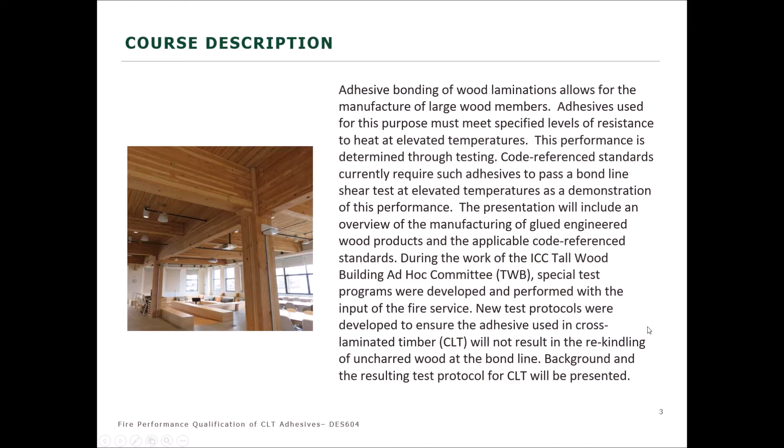You know that this has been going on literally for centuries. Glue laminated timbers go way back, and for that matter, things like plywood.

This is a different type, and among the things we want to cover as a learning objective: what is cross-laminated timber and how is it different from or like other glued laminated products?

What have you done to examine its properties? That would be compartment testing. We're going to talk about the compartment tests that have been done by AWC, by others, going back quite a ways. There are adhesive qualification tests, and ultimately that was the goal of all of this: to come up with a qualification for adhesives to be used in mass timber buildings.

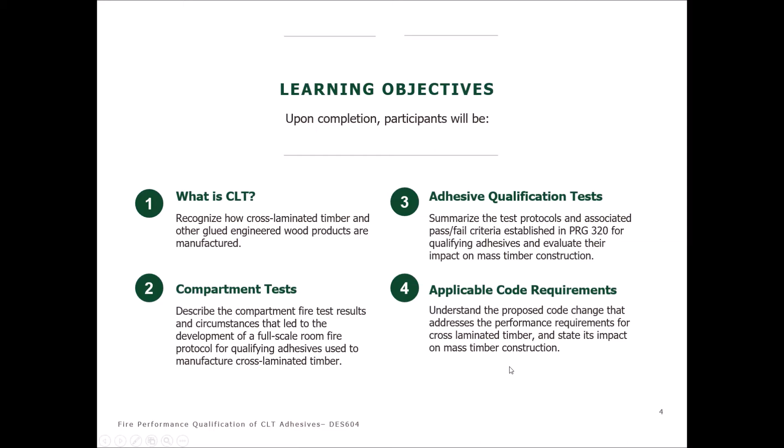And then ultimately there will be some discussion of the Tall Wood Building Ad Hoc Committee's proposed tall wood language.

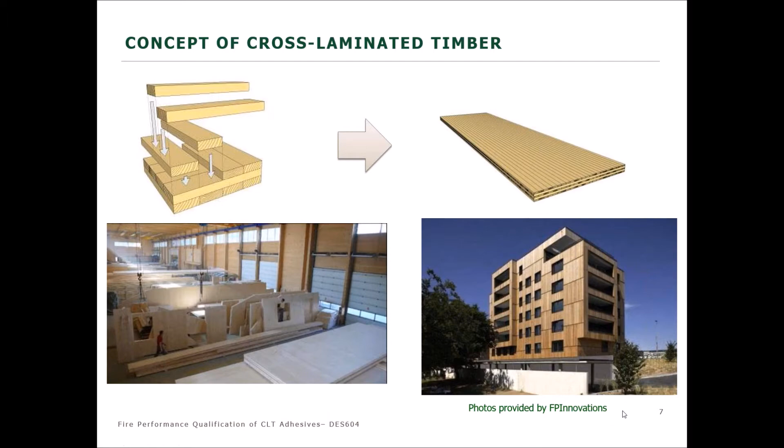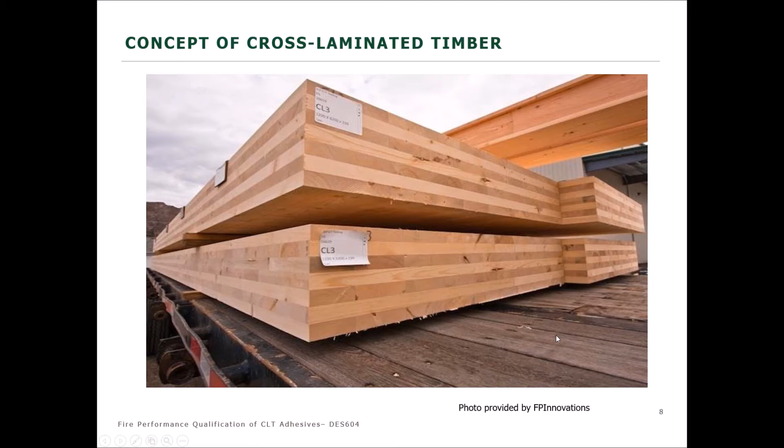Typical is 3 to 7 layers. That can be up to a foot thick, and depending on the manufacturer, it can be 11 or 12 feet wide, 65 to perhaps 80 feet long, depending on who's making it. By the way, having said those dimensions, just remember, after you make this stuff, you've got to ship it someplace. So did you really want to make one 85 feet long?

The concept of CLT is new in building material terms. After all, the research isn't that old. In the 1970s, the first patent in 1985, the first project in 1993, and like any other material, utilization and selling the product results in improved technology. Improved press technology occurred, and by the early 2000s this was an important material advance, and the Europeans took advantage of it. It's primarily driven by the green building movement, and that's because of carbon sequestration.

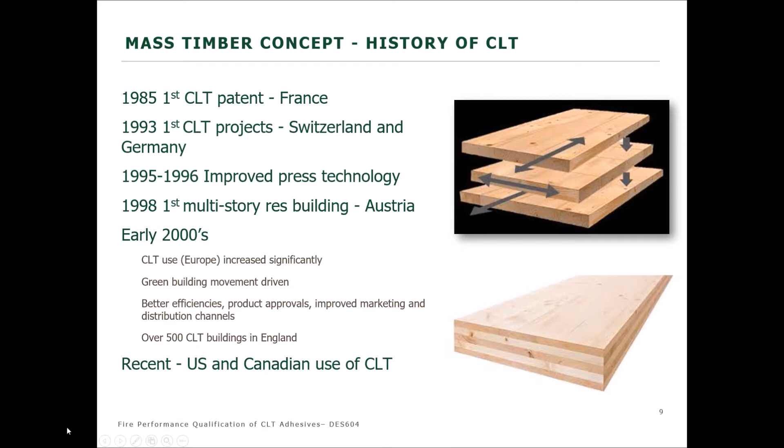And in Europe, the so-called cap and trade on carbon is a big motivator. It costs you money if your green footprint is not good.

So anyway, cross-laminated timber. First, let's have a quick refresher on glue-lam beams: dimension lumber laid up all in the same axis, adhered together, various properties adjusted. For example, if you want more fire resistance, you may add more strength in the tension lams and so forth.

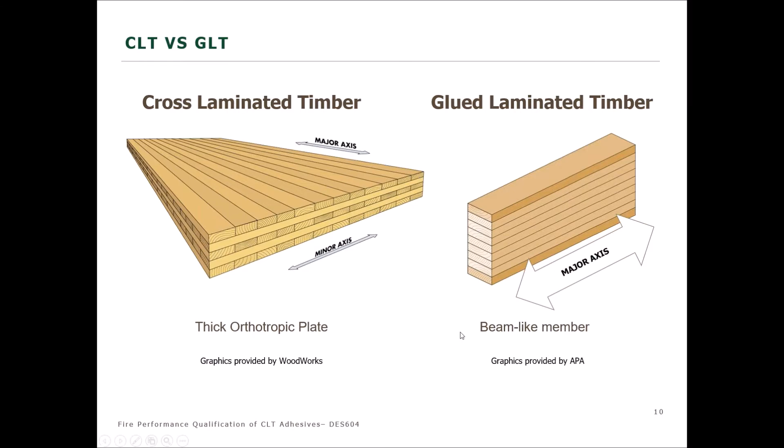So cross-laminated timber is different in the sense that, in this illustration, the top layer of dimension lumber is oriented parallel to the major axis. The next lam down is oriented to the minor axis. And what's different about the two? Well, CLT has two axes, a major and a minor, and they have to be accounted for.

The components of CLT are essentially a lamination - that's a piece of dimension lumber laid next to its neighbor, which is a similar dimension lumber. In the PRG 320 standard, the mechanical properties of those are accounted for. That's what dictates the properties of the CLT panel.

A layer is one or more laminations in the same plane, of the same species, grade, and thickness - so we might have 2 laminations of this 2x material here with their dimension running parallel to the major axis. Those two laminations together would be a single layer.

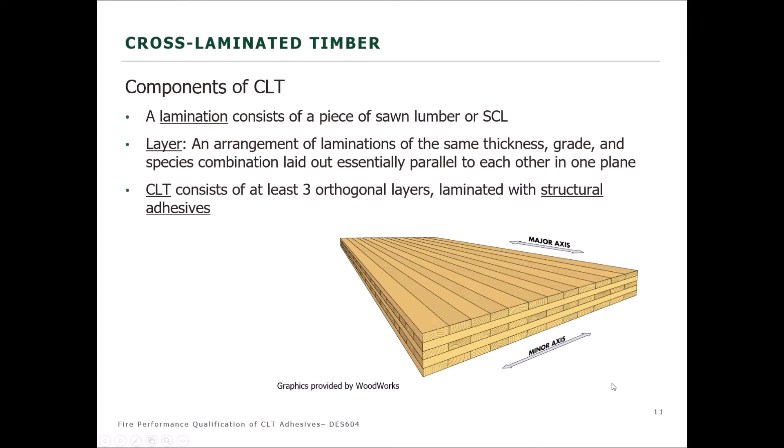And the definition of CLT consists of at least 3 layers with structural adhesives, oriented in orthogonal layers.

Okay, so that brings us to a polling question. Marcy, please. Which of the following is true regarding CLT? All laminations within a single layer are parallel. Alternating layers are perpendicular. There is a major and minor axis. Or, all of the above.

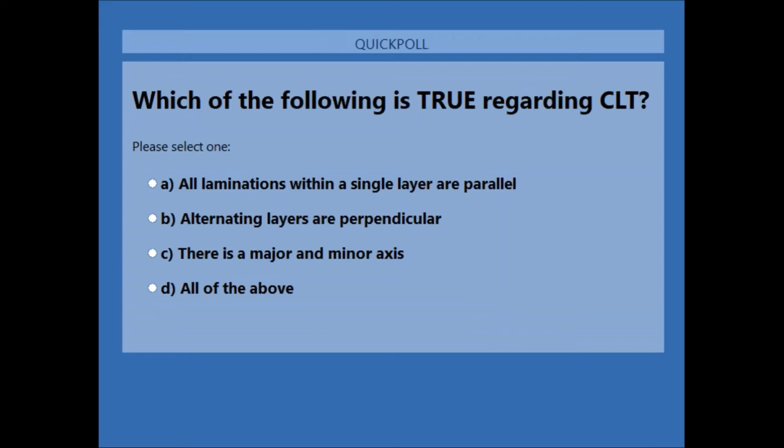We need a little Jeopardy music here. All right, I've got 30 seconds, so I'm going to go ahead and close. And 79%, so that's close enough. Let's see, 89% say all of the above, with just a smattering for each of the others. So I'm going to have you tell us the real answer. Actually, I think we're going to go back to Jason here. Yep, thank you, Marcy.

I'll go ahead and answer that. The correct answer is all of the above, so most people did get it right. Within CLT, it is true that all laminations within a single layer are parallel, the alternating layers are perpendicular to each other, and then there's a major and minor axis as well.

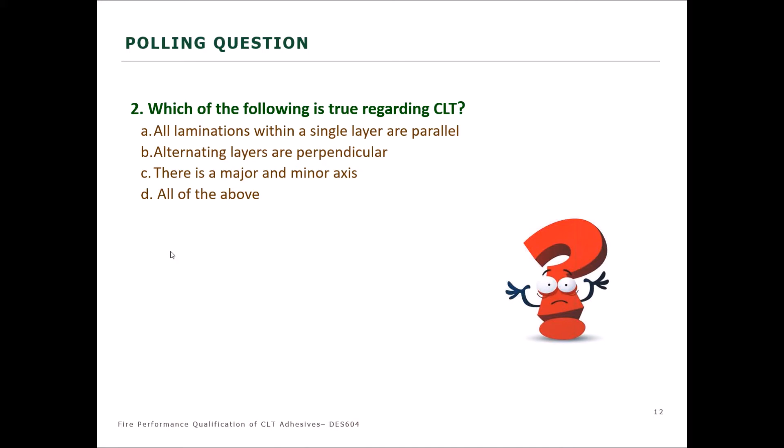So starting on the second portion out of the 4 segments in this webinar, I'm going to talk about the compartment tests, or some of the compartment tests that have been done. In a webinar we presented last week, we spoke about the various fire tests performed in order to guide and inform code development for tall mass timber buildings. The objective of this code development activity is to ensure safe construction practices and safe design for tall mass timber buildings. Many of these fire tests are referred to as compartment fire tests.

A compartment fire test is one performed within a compartment that has at least one opening. These tests simulate a natural fire within an enclosed or sometimes partially enclosed area, such as a room or apartment. The fuel load used for compartment fire tests often consists of real furnishings and other contents typical of the simulated occupancy, for example Group R or residential occupancy. Other fuel types are sometimes used though, such as wood cribs or gas, either in addition to or as an alternative to the real furnishings.

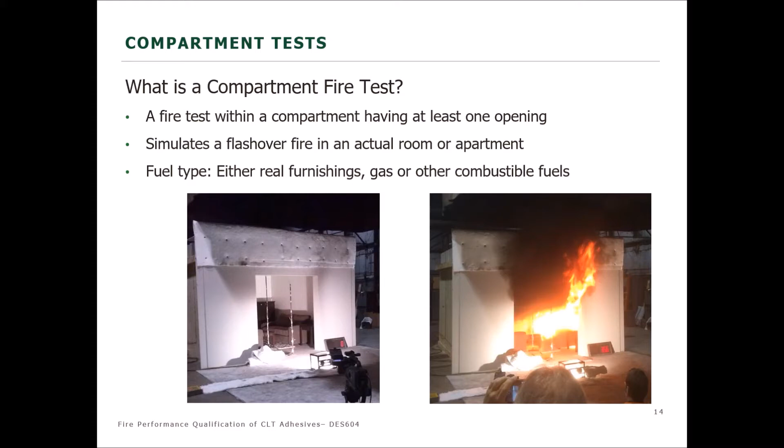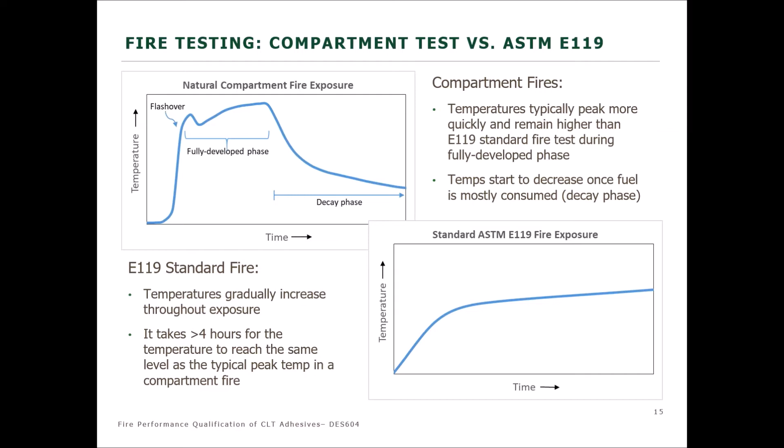In 2017, the Fire Protection Research Foundation, part of the National Fire Protection Association, commissioned a series of 6 compartment fire tests. I spoke about this test series in last week's webinar, but I'm going to delve into them more deeply here because they're of greater importance to this topic. The tests were done for NFPA's Property Insurance Research Group, or PIRG, and the purpose was to collect data on the contribution of CLT elements to compartment fires for insurance modeling.

Testing was performed by the National Research Council of Canada, and it was conducted at the National Institute of Standards and Technology Fire Lab in Gaithersburg, Maryland.

All 6 compartment tests were constructed of CLT with the same overall dimensions: 15 feet wide by 30 feet deep. The opening was 6.5 feet tall by 6 feet wide on 4 compartments, and 6.5 feet tall by 12 feet wide on the other 2, situated on one of the 15-foot end walls. In 2 of the tests, all CLT surfaces were protected — these were the baseline tests, since the CLT did not become involved in the fire and therefore did not contribute to fuel load. In the other 4 tests, various CLT surfaces were exposed.

Fire performance parameters such as heat release rate, temperatures, and heat flux were measured in each test. The contribution of the exposed CLT was determined by subtracting the values of these parameters from those measured in the corresponding baseline test.

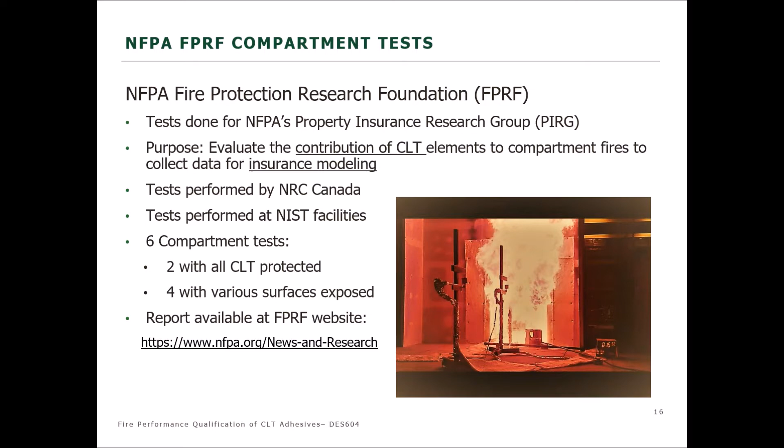Among the findings: the CLT did not significantly contribute to fuel load in compartments with gypsum wallboard on all surfaces — in other words, all mass timber surfaces protected. In those cases, the mass timber did not contribute. For tests in which certain CLT surfaces were left exposed or unprotected, the CLT contribution increased with increasing exposed surface area.

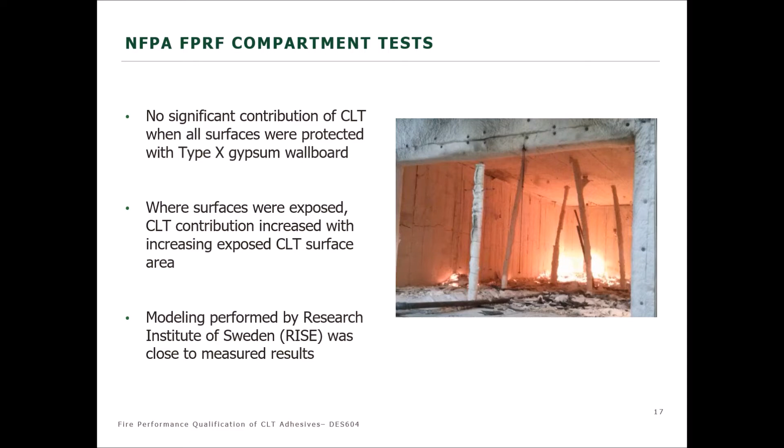As I noted in last week's webinar, the degree to which CLT contributed was modeled by the Research Institute of Sweden, or RISE, in advance of the test. The actual test results in terms of heat release rate and temperature were very close to the model predictions. So the contribution of exposed CLT in a compartment fire can be accurately modeled, and it was confirmed that this is the case.

In addition to those findings, fire regrowth was observed in 3 of the 6 FPRF tests. By fire regrowth, I mean a behavior in which the fire, after cooling significantly during the decay phase, starts to re-intensify again. In each case, the observed fire regrowth coincided with the failure of an adhesive bond line between the layers of CLT.

Based on data from thermocouples embedded within the CLT at depths corresponding to the bond lines, it was apparent that failures were occurring before the char front reached the bond lines. This is what we call heat delamination.

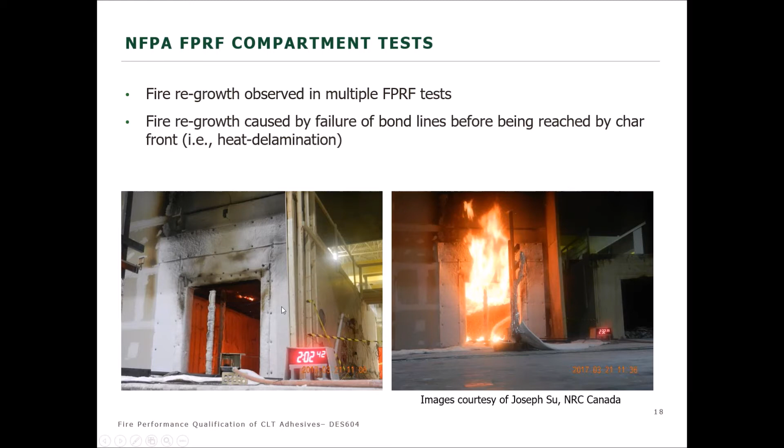One might expect the fire would slowly continue to cool from this point and eventually self-extinguish due to insufficient remaining fuel. But if you look at the photo on the right, you can see that's not what happened in this test. That photo was actually taken just half an hour after the one on the left, and yet the fire had regrown to the point of a second flashover.

So let's focus on that test 1-4 in particular — I'll refer to it from here on as FPRF test 4, for simplicity's sake. Remember, this is the test shown at the bottom of the last slide, and in that test the entire CLT ceiling was exposed. This compartment had an opening size of 6.5 feet high by 6 feet wide, the smaller of the 2 opening sizes tested in the FPRF series.

The comparative baseline for test 4 was test 1-1. Test 1-1 was the same as test 4 in every way, except that it did not have an exposed CLT ceiling. Thus, there was no contribution or involvement of mass timber elements in test 1-1.

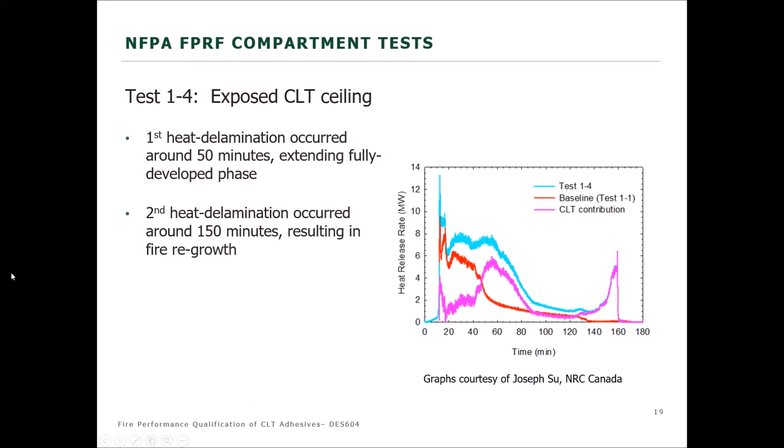Okay, let's watch a video here.

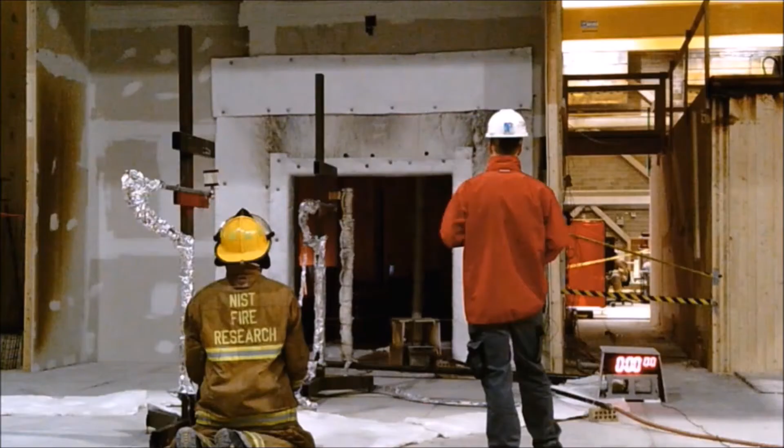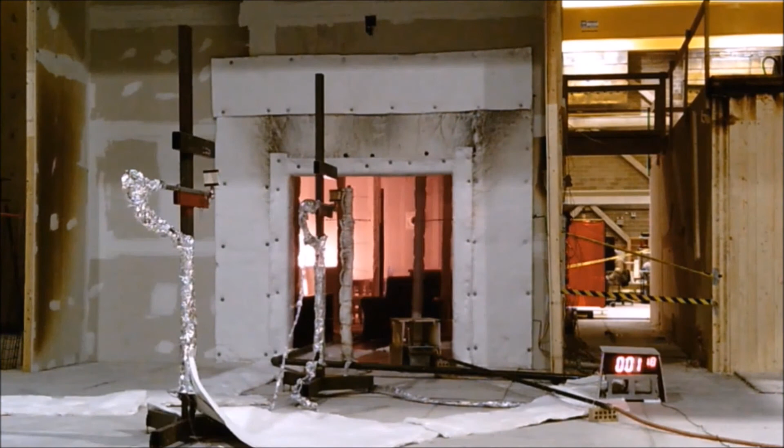This is a video of FPRF test 4. This test lasted for 2 hours and 40 minutes, but this video is greatly accelerated so that it's compressed into approximately 2 minutes. Once again, these tests were performed at NIST. Remember that this is the test that had the exposed CLT ceiling.

So there's flashover, it occurred right around 12 minutes, and this is the fully developed phase. I'm not sure if you can read the clock near the opening of the compartment, but it's just to the right on the ground there. We're at about a half an hour here.

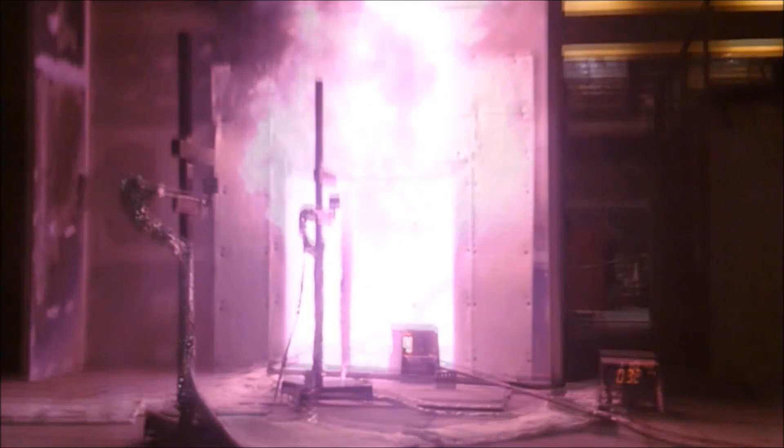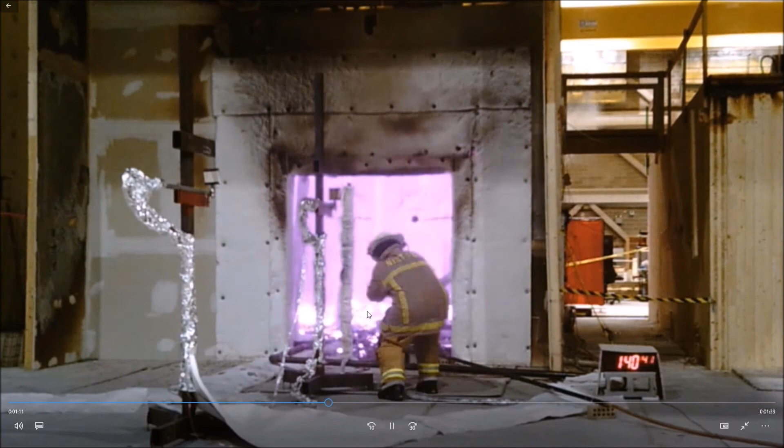Now we skipped forward to about an hour and 40 minutes, and we're entering the decay phase here. This is where the cooling takes place as the combustible contents become mostly consumed. You can see that they're reduced to basically just embers on the floor there now.

Unfortunately, you cannot see the CLT in this video, but it would have a layer of protective char on it at this point, which helps to prevent fire regrowth. But coming up soon here is the start of the heat delamination of the second bond line, which I told you about, and the resulting fire regrowth, which we're approaching now on this video.

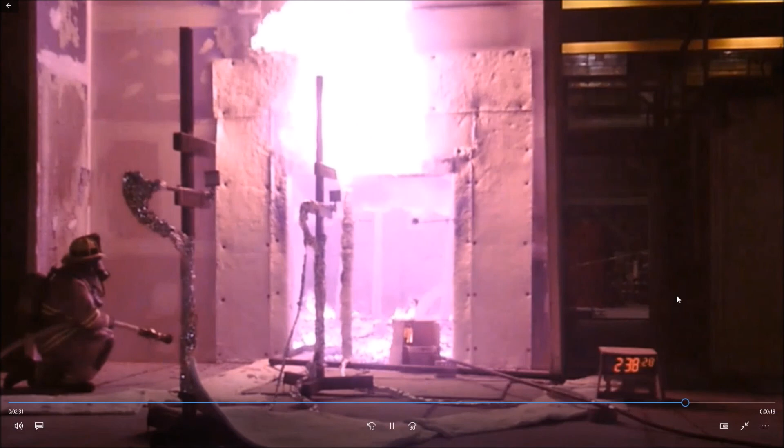And that fire regrowth eventually led to a second flashover. We're at 2.5 hours here. Then they extinguish the test, or terminate the test, at 2 hours and 40 minutes, approximately.

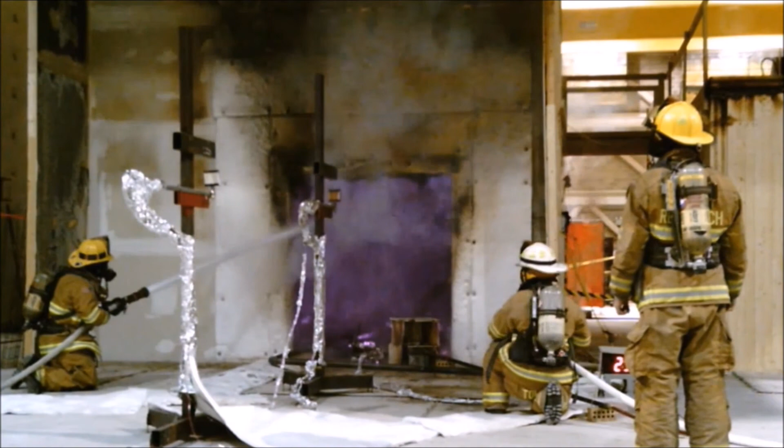Now, the video we just saw was, like I said, FPRF test 4, but the fire regrowth behavior was also observed in other FPRF compartment tests in which there were exposed areas of CLT, either on the ceiling or on the walls. In all of these cases, it appeared that the fire regrowth was caused by a heat delamination of an adhesive bond line within the CLT.

Of course, the implication of this observed behavior is that in rare instances, such as the scenarios represented by this test series, a fire may not necessarily burn out on its own. In other words, it may not self-extinguish even after the furniture and other contents are consumed.

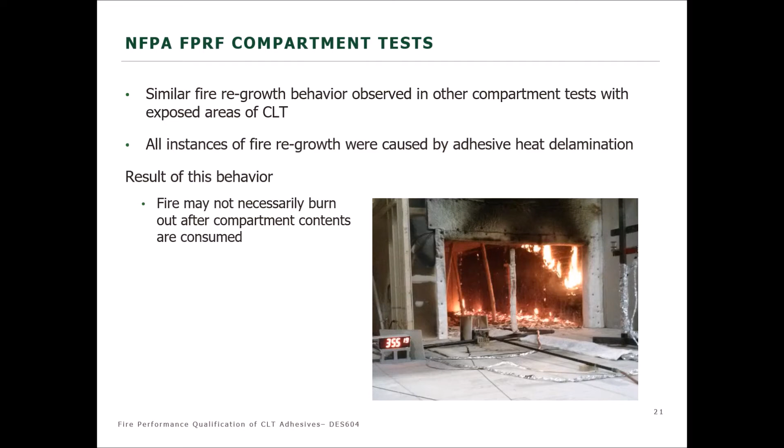Earlier in the decay phase of this test, there was an extended period without flaming on the wall and very low heat release rate. Here again, this fire regrowth was a result of a heat delamination that occurred in one of the bond lines. However, it should be noted that in this test, the fire regrowth was not nearly as intense. It did not result in a second flashover, and the compartment eventually cooled down again on its own. But of course, as we saw in test 1-4, that's not always the case.

Okay, Marcy, would you ask the third poll? In the FPRF compartment tests, all instances of fire regrowth were caused by adhesive heat delamination. Is that true or false?

Our learners are right on top of things here, so we've got about 70% have voted. I've got about 10 more seconds.

All right, I'm going to go ahead and close. And we've got 89% have voted true and 11% false. And Jason, I'm going to let you say what the correct answer is.

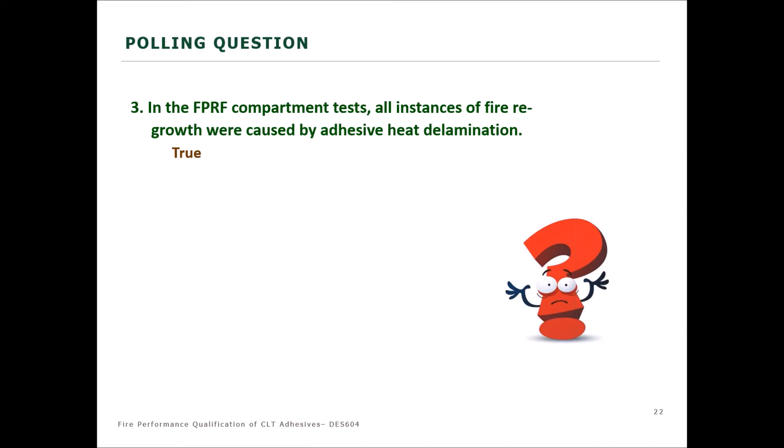Okay, yeah, that's good. Again, most people got it right. It is true that in the FPRF compartment test series, all of the instances of fire regrowth were caused by adhesive heat delamination, and they were directly linked to it.

So moving on to the third segment of today's webinar, we're going to learn about a couple of different adhesive qualification tests that are used and how they were developed. But first, I wanted to speak briefly about a part of the impetus behind the development of these adhesive qualification tests, specifically the direction provided by the ICC Ad Hoc Committee on Tall Wood Buildings. So I'm going to ask Sam if he would talk a little bit about that.

My slide 24 includes the position of the ICC Tall Wood Building Ad Hoc Committee. You're seeing a slide that shows solid wood with a char layer. The important parts of that illustration are that wood chars at a predictable, steady rate, that the char insulates the wood, and the unheated center core maintains its mechanical properties, strength, stiffness, etc. So the performance, both structural and fire performance of wood, is predictable.

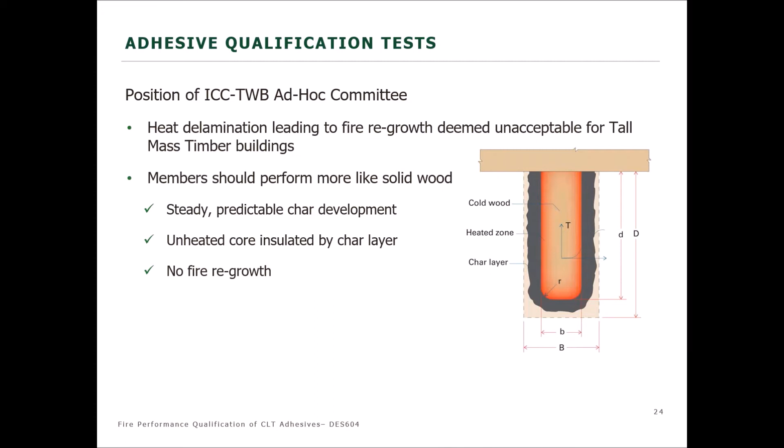The position of the ad hoc committee was great, but if you have fire regrowth, or if you have delamination because adhesives behave differently than straight solid sawn material, what happens? The position of the ad hoc was actually to draft code language. So Jason, if you would advance to slide 25.

The ad hoc had 4 working groups, including one on fire, and that fire work group identified the need to develop a test protocol. That group developed language that requires fire performance of CLT, and requires labeling of the CLT reflecting that performance, which can be interpreted to be a protocol for heat delaminating adhesives.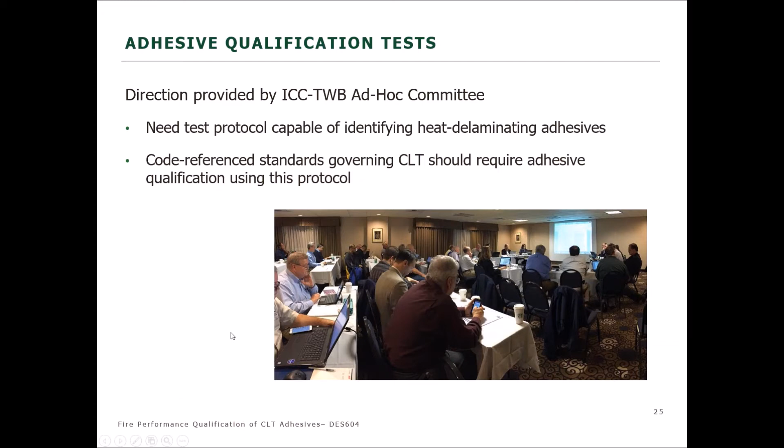There are actually two things going on here. One is delamination, the other is fire regrowth, and it was the ad hoc's position that both needed to be identified, and the acceptable performance required by some protocol. So if you'll give me slide 26, then I'll let Jason pick up again with the testing that begun at Southwest Research.

Okay, great. Thank you, Sam. So based on the direction provided by the ICC TWB Ad Hoc Committee that Sam just mentioned, in the fall of 2017, AWC commissioned Southwest Research Institute to develop a test protocol which would be capable of distinguishing between adhesives that can lead to fire regrowth versus those that do not.

Specifically, there was interest in replicating the severe exposure conditions of the FPRF compartment test series to determine whether or not the same fire regrowth behavior would have been observed if the FPRF test had been performed using CLT products made with other adhesives.

In order to determine this, it was necessary to replicate many of the aspects of the FPRF compartment tests. For example, a large-scale compartment test was used rather than a small or intermediate scale compartment, and the aspect ratio of the compartment footprint was about the same, about 2:1 depth to width ratio. Also, the compartments were constructed to have the same ventilation ratio as that of the FPRF tests, having a small opening, which was about 0.03 meters to the 0.5.

I will note that this compartment size was not exactly the same size. It was smaller than what was used in the FPRF test series. However, it's large for a standardized test, and it also had the same aspect ratio and same ventilation ratio.

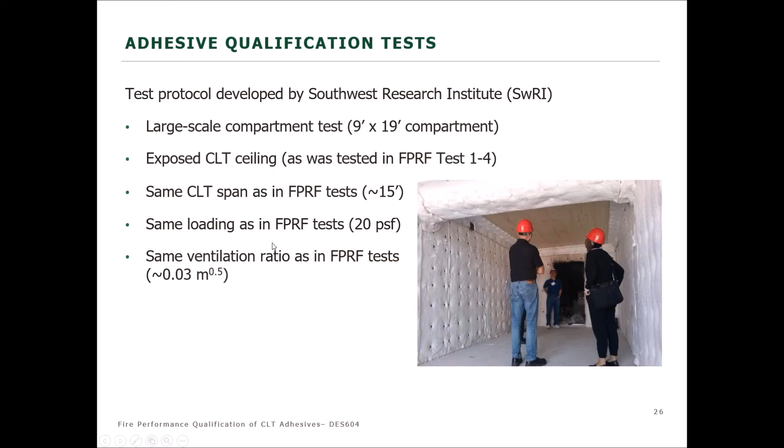As for the exposure, the gas burners within the test compartment were calibrated to replicate the exposure conditions measured in one of the FPRF baseline tests, test 1-1. This was the baseline test that had the small opening, the 6.5 foot high by 6 foot wide opening. This exposure replication was based on the measured heat flux near the ceiling in the FPRF test.

The graph on the left shows temperatures that were measured on one of the thermocouple trees in FPRF test 1-1 with respect to time. The graph on the right shows temperatures measured in the large-scale compartment test calibration performed at Southwest. Note that the time-temperature curves are similar. They're not exactly the same, but that's because, as I mentioned, this replication was based on heat flux to the ceiling rather than temperature.

So it's really based on exposure to the CLT. The discontinuities or apparent steps in this graph, the graph on the right, are a result of the fact that the gas flow rate followed a step function rather than a continuous curve. But the heat flux to the ceiling at any given time, and more importantly, the cumulative heat flux to the ceiling throughout the test, were very close to the measured values in FPRF test 1.

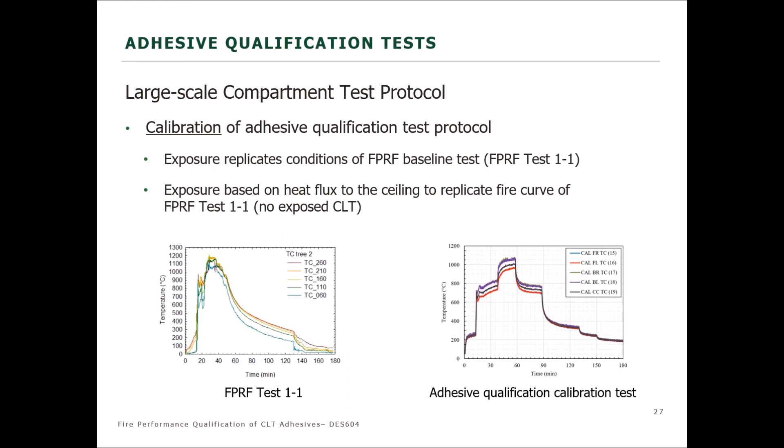So the calibration test confirmed that it was possible to replicate the conditions of FPRF baseline test 1. However, it was still necessary to validate the test protocol by testing the same CLT that was used in the FPRF test series. As I noted previously, this test protocol involves an exposed CLT ceiling, which is the same condition that was tested in FPRF test 4.

So it follows that the test protocol would be considered valid if the test performed on the same CLT that was used in the FPRF tests resulted in the same behavior that was measured in that test. These are some of the photos of the validation test that was performed at Southwest.

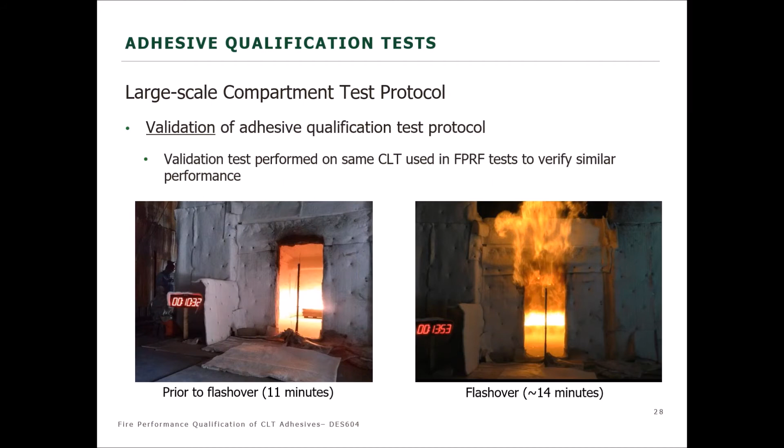The photo on the left was taken at about 10.5 minutes, just prior to flashover. You can still somewhat make out the exposed CLT ceiling because at this point it had not yet ignited. The photo on the right was taken just after flashover, about 14 minutes after the start of the test.

Here are two photos from the fully developed stage of the validation test. The one on the left was taken near the beginning of the fully developed phase, about 15 minutes. If you're wondering what was causing that little bit of flaming on the floor near the opening, that was actually just the gypsum wallboard facing paper. The lab placed that there to protect the concrete floor from the fire.

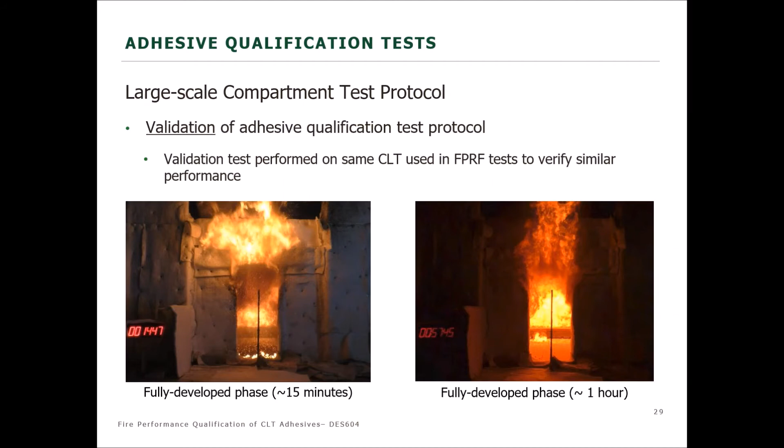The photo on the right was taken at about 1 hour, which was about two-thirds of the way through the fully developed phase. It was right around this time that the first bond line started to undergo heat delamination. This corresponded closely with the performance that was observed in FPRF test 4 at this stage.

On this slide, the photo on the left shows you a visual of the conditions within the test compartment during the decay phase. This photo was taken about 3 hours into the test, just before the fire regrowth started. The photo on the right was taken about 12 minutes after the one on the left, at about 3 hours and 10 minutes.

You can see that there was indeed significant fire regrowth leading to a second flashover. This fire regrowth here, again, just like in the FPRF tests, was caused by the delamination of the second bond line in the exposed CLT ceiling.

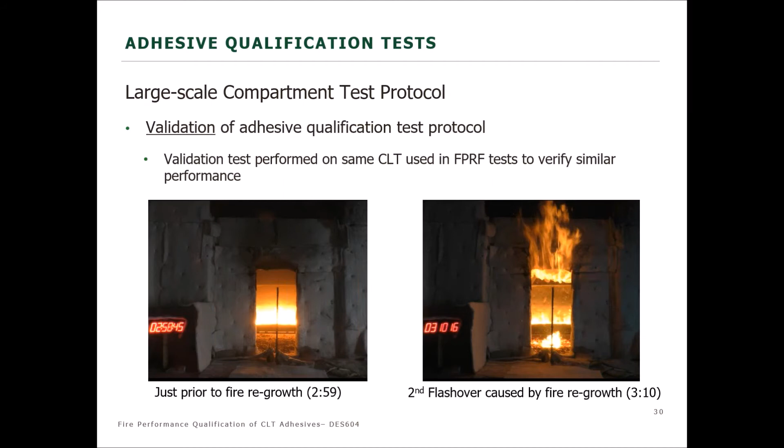Let's watch a video of that one now.

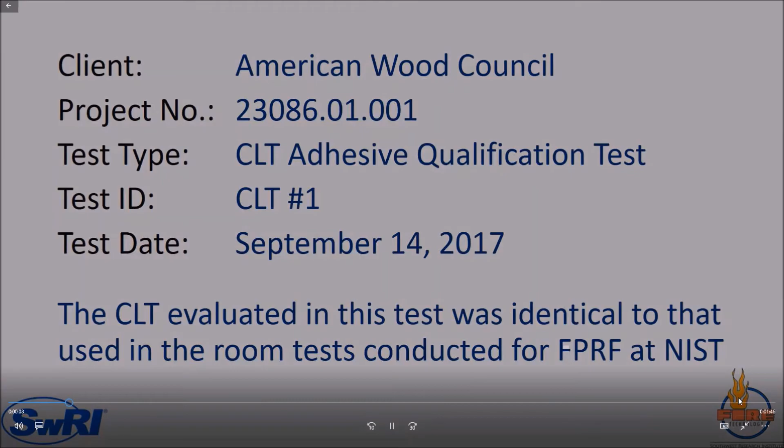Again, this is the validation test of the adhesive qualification procedure, or protocol, that was developed at Southwest Research Institute. This was a 3 hour and 11-minute test, compressed into about a 2-minute time frame. So there are some times here when it's played very quickly. It's slowed down at this point because this is the flashover here, about 13 or 14 minutes.

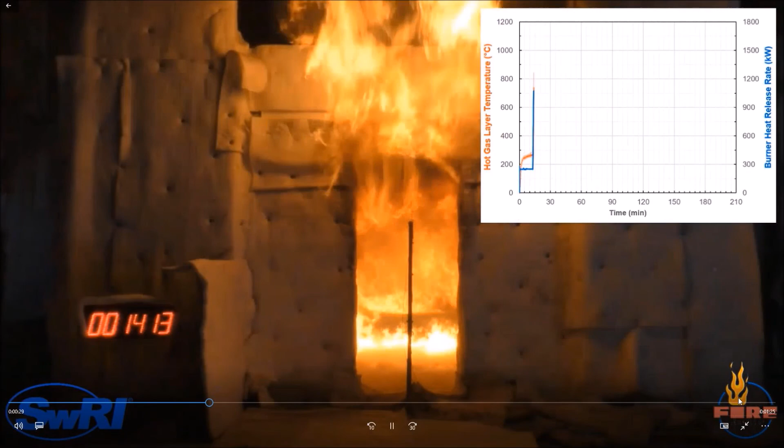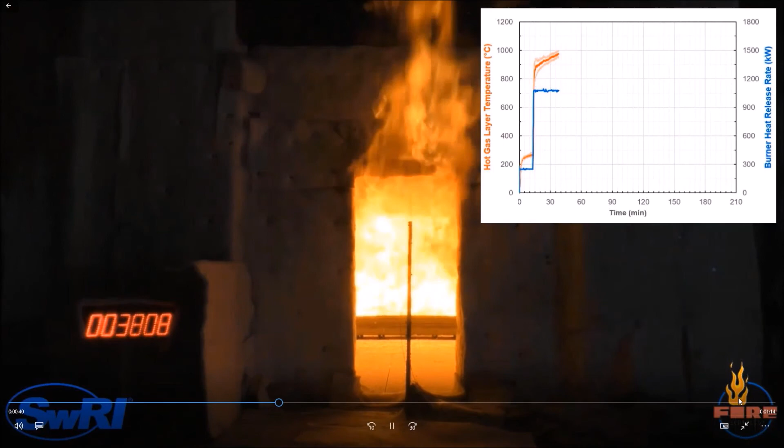And this is the fully developed phase. We just skipped ahead to 38 minutes there. Still in the fully developed phase at this point. Now we're past 1 hour.

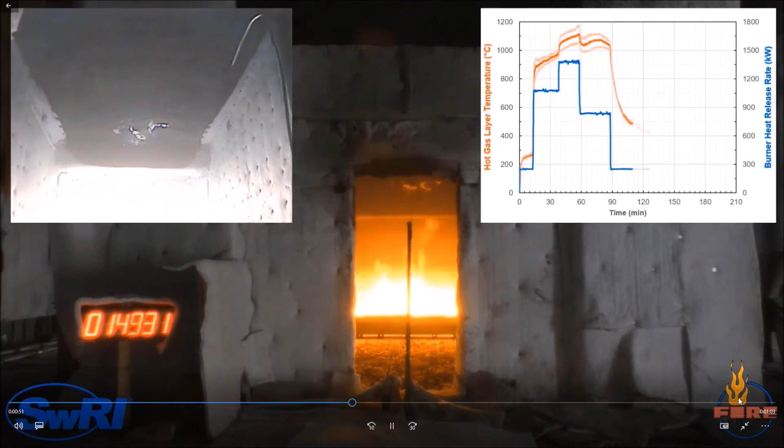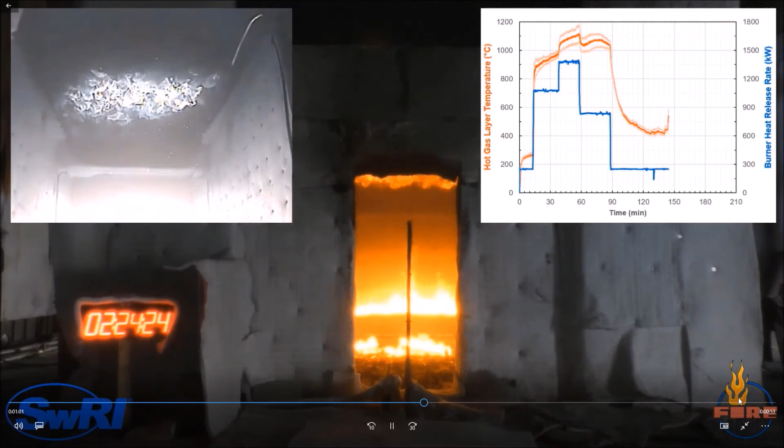And this is past 2 hours now, in the decay phase. You can see that for the most part, there's a protective layer of char over the entire ceiling. However, you do see some flare-ups that are occurring there, some fire regrowth.

Now we're getting to the point where the major fire regrowth, the significant fire regrowth, started to occur just past the 3 hour mark, and it did result in a second flashover, which you can see there. By the way, the inset there is the ceiling - you probably figured that out already. That's the black and white image in the top left. The test was terminated at about 3 hours and 11 minutes.

Here are the measured time-temperature curves from the 4 different compartment tests that we've talked about so far. The 2 graphs on the left are from the FPRF tests, while the 2 on the right are from the tests that were performed at Southwest Research Institute.

The time-temperature curve of the validation test that we just saw in the video is shown in the lower right, and the curve of FPRF test 4, which we saw in the first video, is shown in the lower left. The graphs at the top are from the tests performed without any exposed CLT, so they're like the baseline tests, while the ones on the bottom are from the compartments that had exposed CLT on the ceilings.

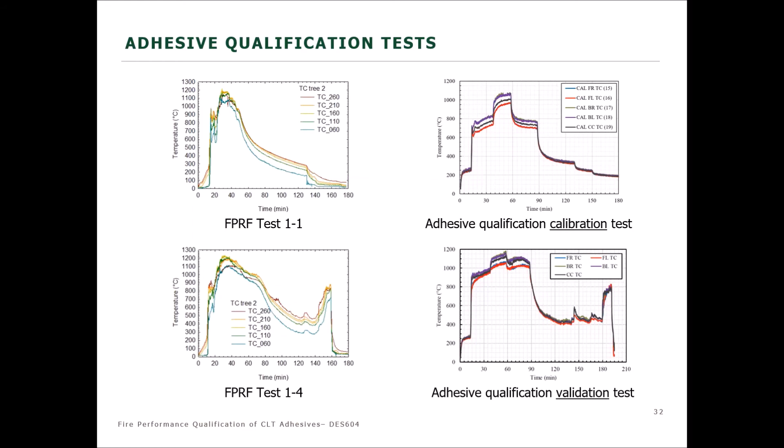As you can see, there are similar differences between the graphs on the top versus the respective graphs on the bottom. This indication of how the exposed CLT affected the temperatures within the compartments was consistent between the two test series.

Now let's just look at the two tests in which there was an exposed CLT ceiling. A comparison of the temperatures at the ceiling reveals that during the decay phase, just prior to the fire regrowth, temperatures were about 450 degrees Celsius. This was the case for both the FPRF test and the validation test performed at Southwest. The measured temperatures from the two tests were also consistent with each other at the end of each test during the fire regrowth stage. In both tests, the measured temperatures were right around 800 degrees Celsius at this stage, near the end of the test.

This provides conclusive validation of the adhesive qualification test protocol. The objective of functionally replicating the exposure conditions measured in the FPRF compartment test with a more repeatable and slightly smaller test protocol had been achieved.

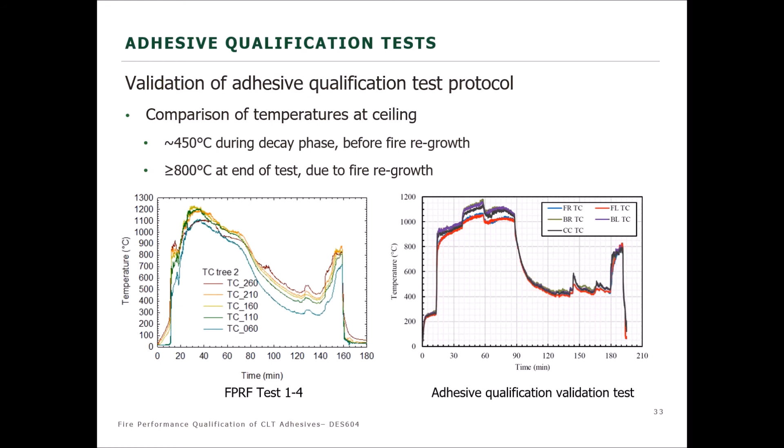As I mentioned earlier, one of the reasons we wanted to develop this test protocol was to determine whether or not the same fire regrowth behavior would have been observed if the FPRF test had been performed using CLT products made with other adhesives. To that end, CLT products made with other adhesives were also subjected to the same exposure under this test protocol.

For example, the time temperature graph from a test performed on CLT made with melamine formaldehyde resin is shown on the lower left, and on the lower right is a time temperature curve from a test performed on CLT made with an improved formulation of polyurethane resin. So that's the improved version of polyurethane resin there.

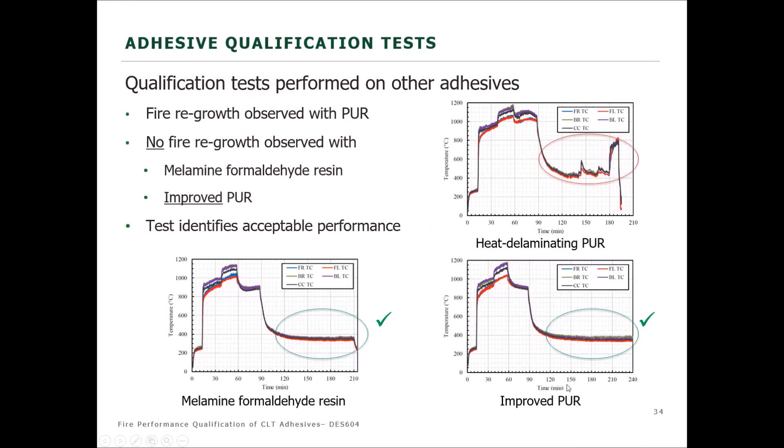So if you inspect both of these graphs at the bottom of this slide, you can see that no fire regrowth occurred during either of these tests. This is obviously very different performance than that observed in the CLT made from the heat delaminating polyurethane resin. In fact, these graphs confirm performance that is very much in line with what would be expected from solid wood.

In addition to the large-scale compartment tests we've been looking at, there's also an additional small-scale adhesive test used for CLT adhesives in North America. Specifically, I'm referring to CSA O177, which is referenced within the PRG 320 standard, the product standard for CLT referenced in the code.

In this test, a specimen of CLT made with the adhesive being qualified is exposed to a Bunsen burner flame having a temperature of between 800 and 900 degrees Celsius. The exposed face is the edge or cross-section of the CLT, such that the edges of the glue lines are directly exposed to the flame. The duration of this exposure is 10 minutes, 5 minutes in 2 different orientations.

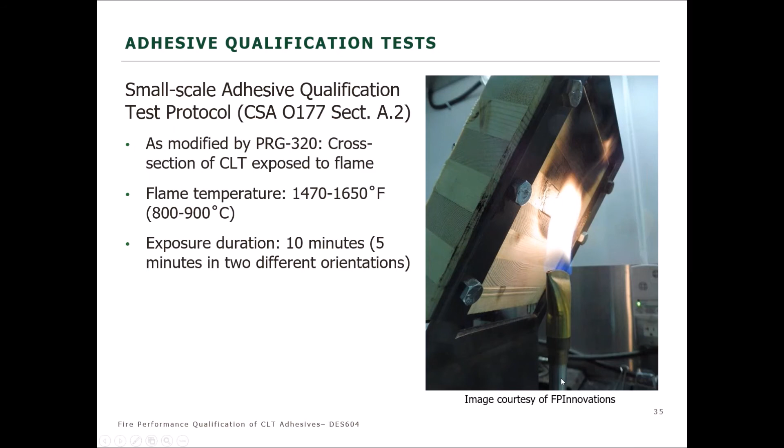Following the test, the samples are cut in half so the cross-section of the specimen is visible. The CLT samples are then inspected for delamination using an optical comparator to measure the 5 inner bond lines for the total length of delamination. Under the acceptance criteria specified within this standard, the sum of the delamination of these 5 exposed bond lines shall not exceed 3 millimeters, a little less than 1/8 of an inch. So that's the sum of all of these, and it needs to be less than 1/8 of an inch.

As such, this small-scale test distinguishes between adhesives that undergo heat delamination versus those that do not.

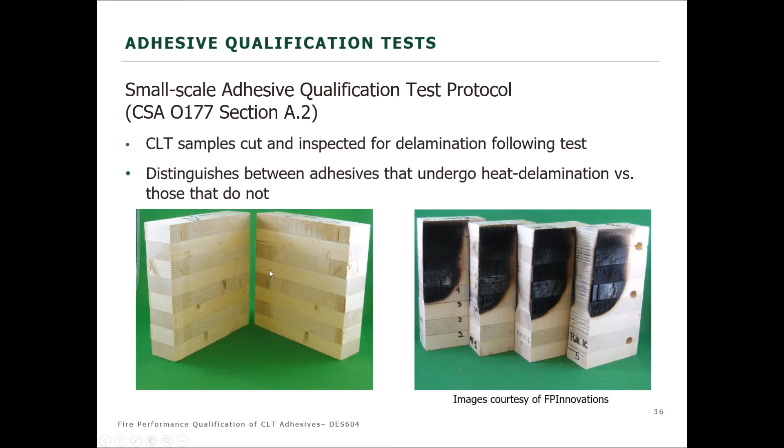This photo on the left shows what the samples look like before the test, and this is after the test here.

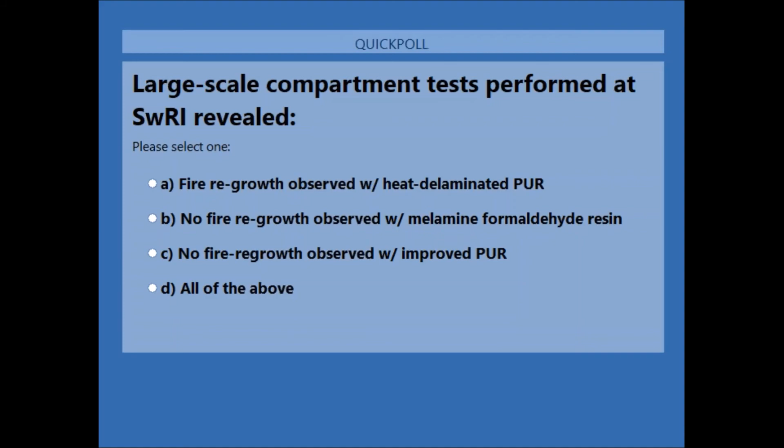All right, Jason, we've got 80% say all of the above, 10% say fire regrowth observed with heat delaminated PUR, and just 5% for each of the others. I'm going to let you tell us what the real answer is.

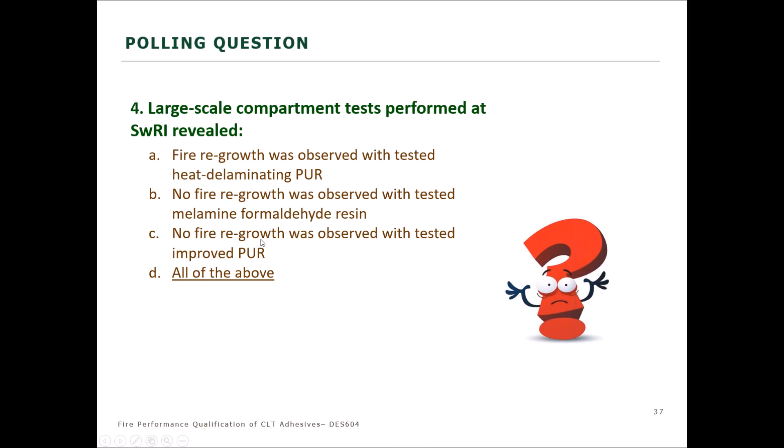Okay, let's go with the majority, and they are correct. The answer is all of the above. Like I just reviewed, the heat delaminating PUR did result in fire regrowth. No fire regrowth was observed with either of the other adhesives. So it's all of the above.

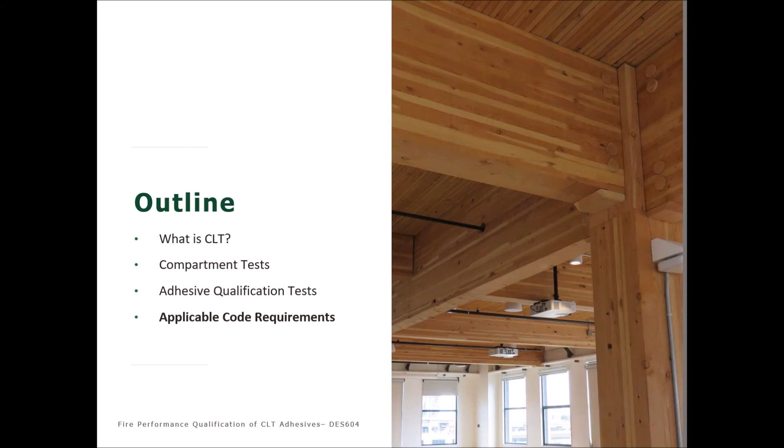Last segment here, we're going to talk about the applicable code requirements that pertain to this particular topic, and that is adhesives used in CLT.

Let's start with the International Building Code, IBC. I'm sure most of you are already familiar with it. It's the model building code used as the regulatory basis throughout the US for building construction. Chapter 23 of the IBC requires that CLT be manufactured and identified in accordance with ANSI APA PRG 320.

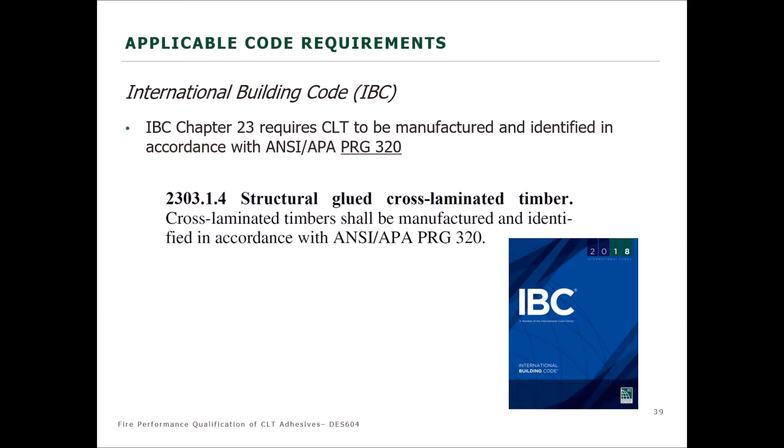PRG 320 is the American National Standard for performance-rated cross-laminated timber. Specifically, this requirement is given in section 2303.1.4 of the IBC.

As a product standard, PRG 320 specifies a wide range of requirements for CLT used in building construction. The provisions include requirements governing dimensions and tolerances, specifications and performance, qualification and marking requirements for the CLT, and quality assurance requirements. In other words, this code referenced product standard is all-encompassing, and it covers every aspect of importance for CLT used in buildings in North America.

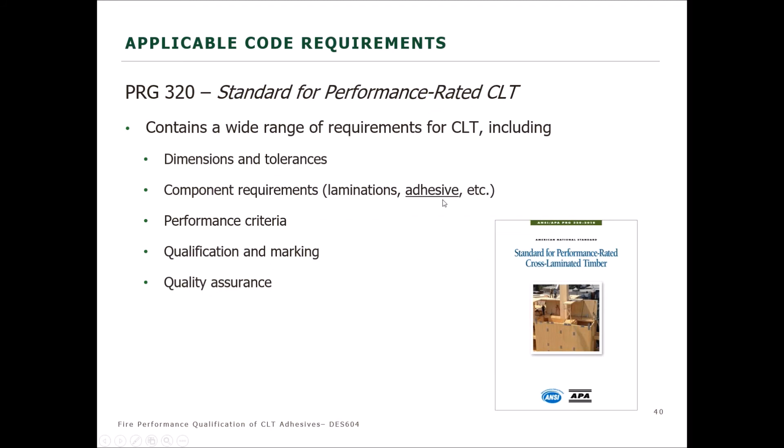But the one we're most interested in, of course, is adhesives for this particular webinar. So let's look specifically at the provisions pertaining to that.

Section 6.3.1 requires compliance with ANSI 405, which specifies various types of adhesive tests, including the small-scale CSA O177 test that I described a little earlier.

So Section 6.3.1 mandates compliance with the small-scale test, but then in addition, Section 6.3.3 of PRG 320 also requires that the adhesive be qualified in accordance with a new mandatory annex, Annex B, which is now part of the 2018 version of PRG 320.

The test protocol described in Annex B is a large-scale compartment test that is essentially the same as the test I just got finished describing, which was developed at Southwest Research Institute. As you'll recall, this large-scale compartment test measures fire regrowth, or more importantly, lack thereof, as the case should be.

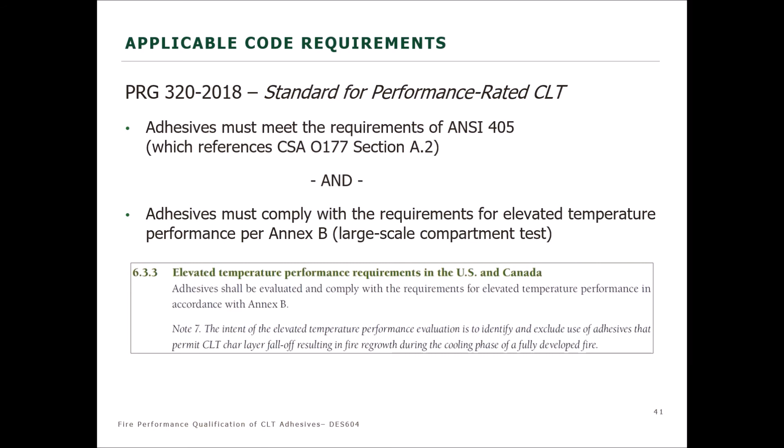The text shown in this box is an excerpt from section 6.3.3 of PRG 320-18. One of the notes, directly below section 6.3.3, clearly states the intention of this provision: to identify and exclude the use of adhesives that exhibit behavior resulting in fire regrowth during the cooling phase of a fire.

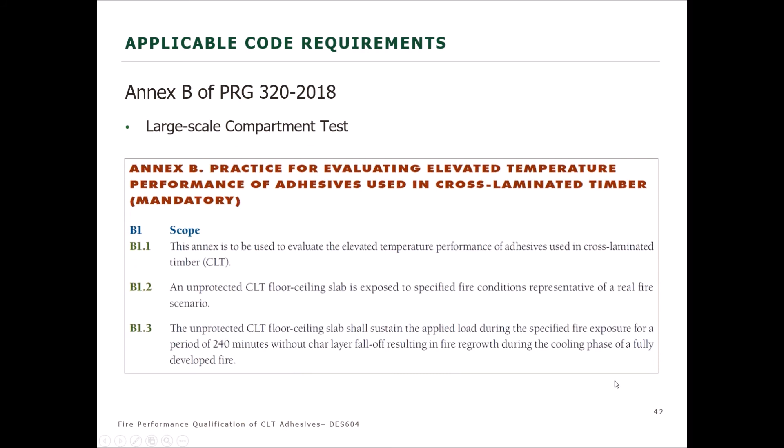Here's the scoping language. I won't talk much about this because it's basically covered in section B1.3, which is kind of a repetition of the acceptance criteria, which I'm going to talk about next, two slides from now.

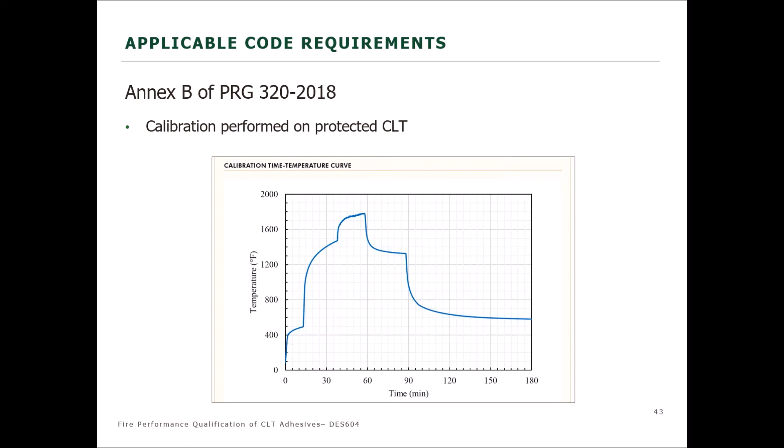The laboratory performing the adhesive qualification calibrates their test apparatus by adjusting the fuel flow rate to achieve this specified time temperature curve. As we discussed earlier, this is not exactly the same as the measured time temperature curve from FPRF test 1. Rather, it represents the time temperature curve necessary to achieve the same heat flux to the ceiling as in FPRF test 1.

Once the test apparatus is calibrated, an 8-foot wide by 16-foot long CLT specimen made with the adhesive being qualified is placed in the test compartment such that it forms an exposed ceiling within the compartment. The exposed CLT floor ceiling assembly is then loaded and subjected to the prescribed exposure, which replicates the relatively severe exposure of the FPRF test.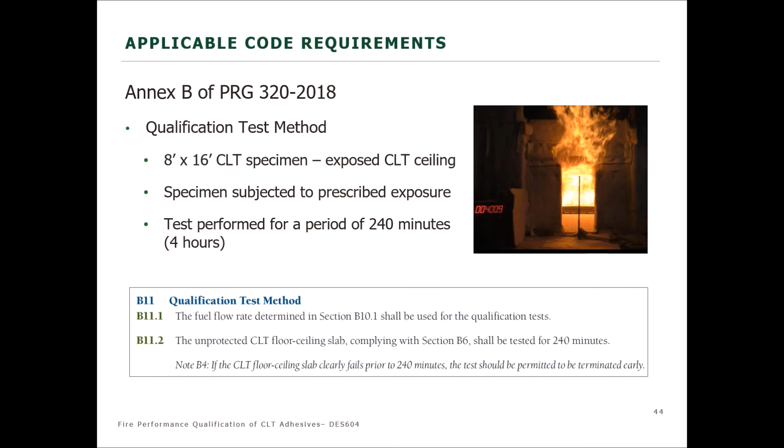Let's talk about the acceptance criteria. The acceptance criteria for determining whether or not the adhesive qualifies for use in CLT under the IBC are given in section B12 of PRG 320. They require two things in particular, as you can see in the excerpt box here.

First of all, the exposed CLT assembly must sustain the applied load throughout the entire 4-hour test. And then secondly, the temperatures measured by the 5 thermocouples at the ceiling must all remain below 510 degrees Celsius throughout the time period from 150 minutes all the way through to the end of the test.

Recall that significant fire regrowth was observed in the validation test performed during the development of this test protocol at Southwest. During the fire regrowth stage in that particular test, measured temperatures far exceeded this threshold limit that's now specified in PRG 320. In fact, it was exceeded by several hundred degrees.

So therefore, the adhesive that was used for the CLT tested in the FPRF test series would clearly fail these new requirements and would not be permitted by the code for tall mass timber buildings.

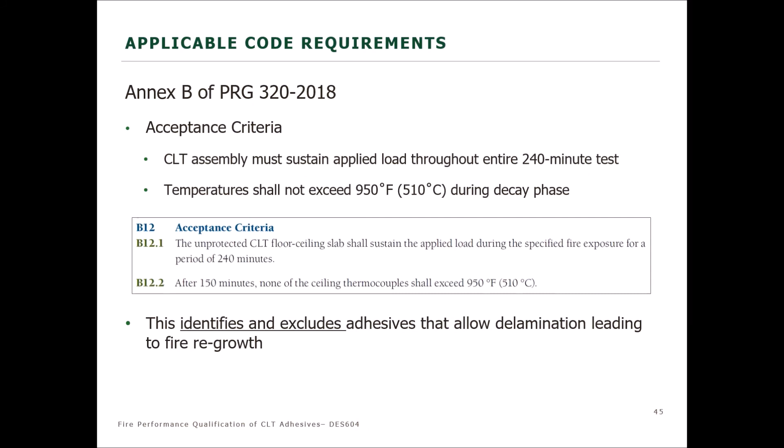In summary, these new code provisions provide the mandatory code-prescribed regulatory means of identifying and excluding adhesives that allow heat delamination leading to fire regrowth. They establish a means for ensuring that CLT used in buildings will perform like solid wood in the event of a fire. In other words, when exposed to fire, the members will undergo steady, easily modeled char development and maintain an unheated core insulated by the char layer. Most importantly, they will not exhibit any behavior leading to fire regrowth.

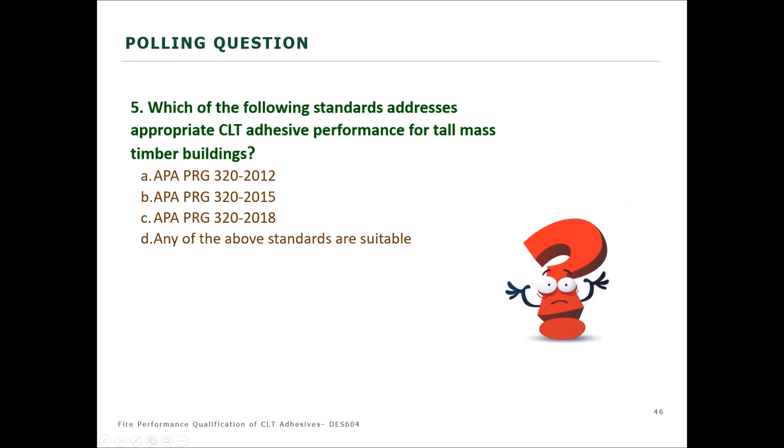All right, the correct answer is the 2018 version of APA PRG 320. That's the version that includes the full-scale test protocol for adhesive qualification that I've been describing, and so that is the one that is appropriate for CLT adhesive performance for tall mass timber buildings.